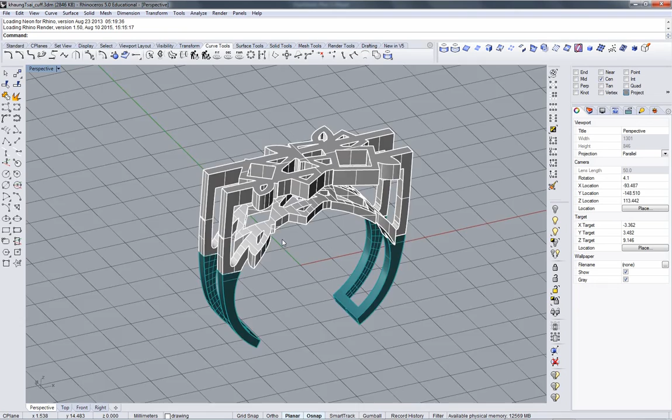Set to parallel, which is hard to look at. There we go.

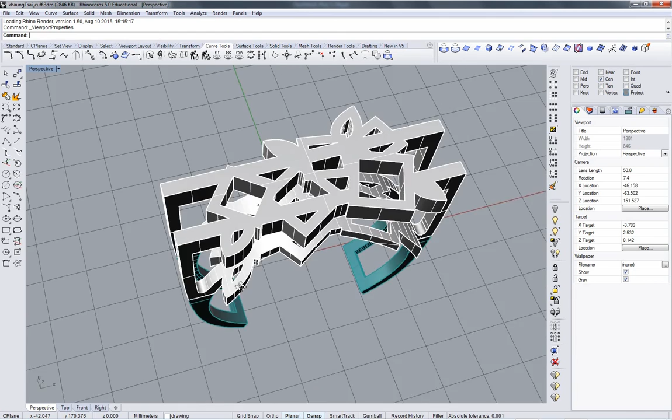So are you going to do anything here in the front, or just leave it open like this? Leave it open. Okay, and who's your mentor? Chia. And is he okay with just leaving it open? Yes, because in the beginning it was solid. Yeah, I had pictured you cutting some interesting shapes and patterns out. Because it was pretty heavy, and once I cut it, I just left it lighter. But you're right, I didn't think about that. Yeah, because you could do some interesting patterns and design across here instead of just an opening.

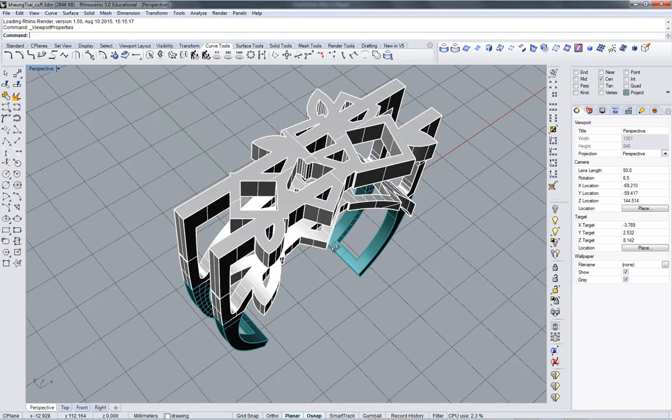And the stones are going to go where? To empty spots first. Do you have stones in the file? Because I don't know how to model a princess cut. Okay, they're easy, I'll show you.

So you're considering this complete at this point? Well, I'm gonna reconsider the whole thing. Okay.

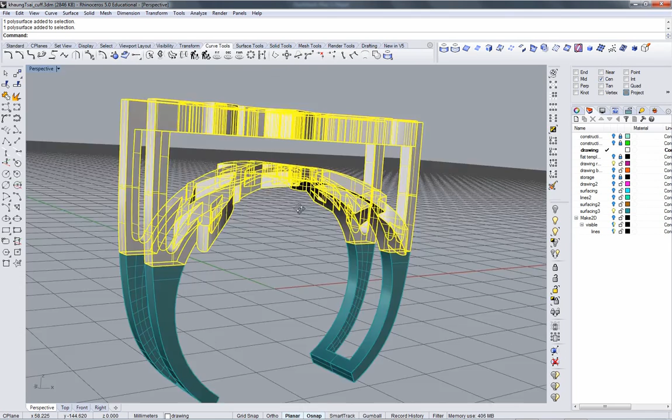And has Chia told you how he would like to have you do this? I talked to Chia and I just told him I was gonna do it right now, but I haven't had another conversation with him at this stage. Because one of our concerns is going to be whether or not it can fit into the printer now.

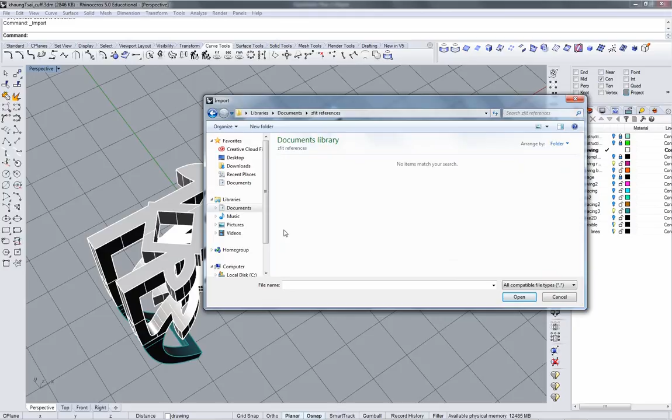If I printed it outside, is it too big in general for all printers? Well, other printers have different, yeah.

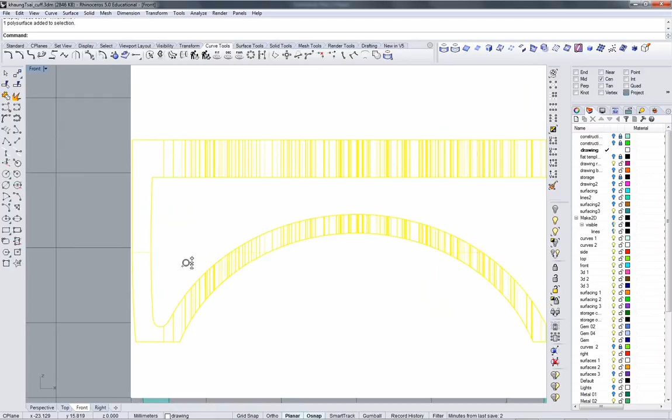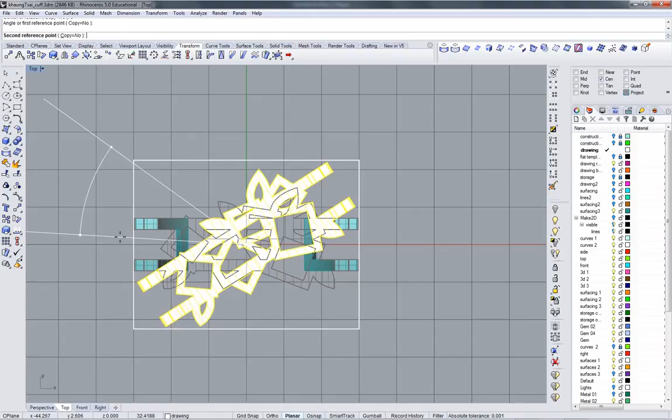Okay. So that tells you you are at the very limit of what that will take. So the way I would have to do this, or the way I would do this, is I'd rotate it. I mean, that's not much better, but that's what I would have to do, something like that.

And then as far as the support direction...

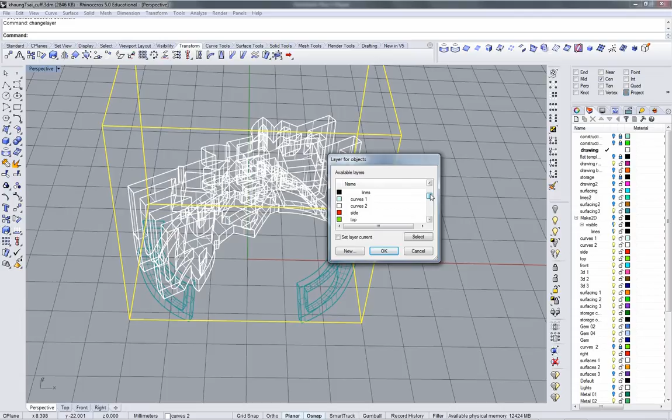I have a question. And you're not in trouble, I'm just curious. I say you're not in trouble because our tutor had brought this up with a student, and the student got very defensive.

This is a matrix file. Where did you get a matrix file from? I'm not sure, because this is matrix. You know how you can tell when something's matrix? The layer names. I helped develop matrix, so I know all there is to know about matrix. I don't even know the difference between matrix and like, see this? These are all exclusively matrix files, from my matrix layers, yeah. I don't. In fact, this one has something on it, which is from matrix. It's got a head, a matrix head.

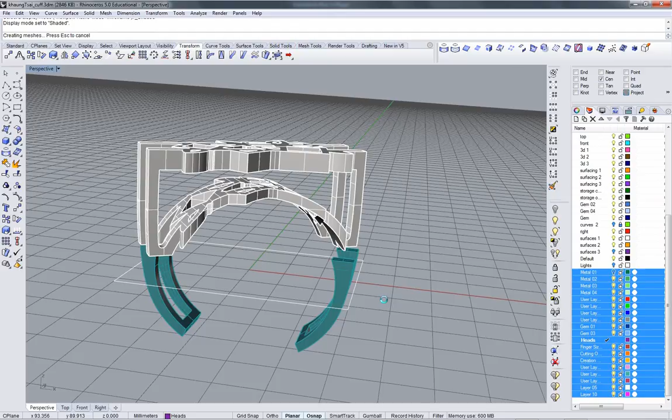So like, what is matrix? It's like... matrix is thousands of dollars. It's a Rhino plugin. Oh. The stupid version. Yes, see, this was done in matrix. I don't recognize this. This isn't like... yeah, that's what's... oh.

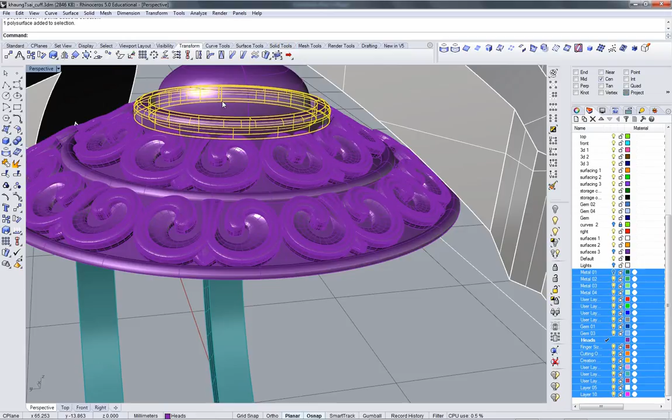It's just not sure. Yeah, interesting. The only reason I ask is because matrix is very confusing to work with. It's not hard, it's Rhino with a black interface. So matrix is a part of Rhino? Or it's a plugin for Rhino. Okay, and it's a software that's developed around Rhino to make Rhino's interface easier to use for jewelry.

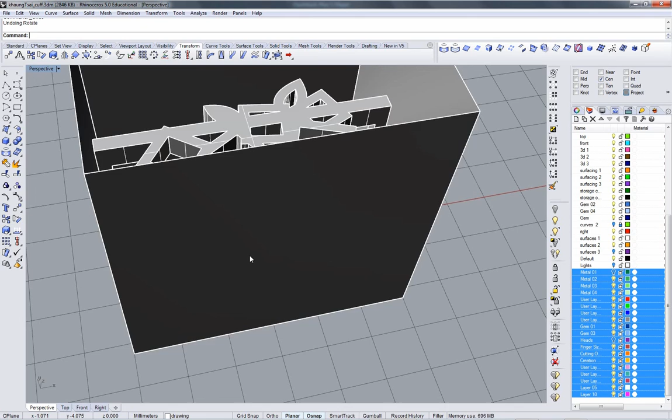It's very expensive software. I'm really not sure how I'm going to sprue your part to support it. I will probably rotate it. You know, this isn't really your concern, but I need to know because I need to find out if you need to make it more than one piece.

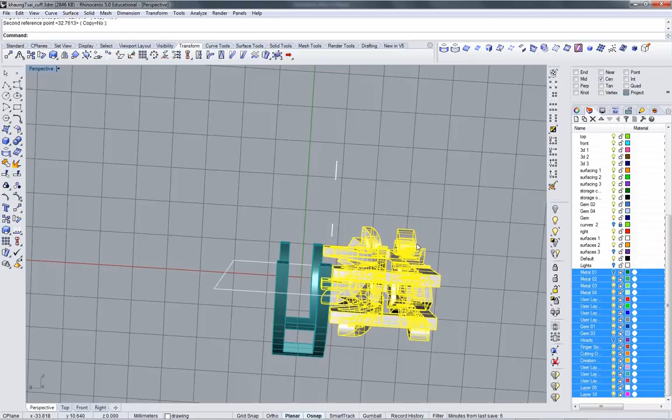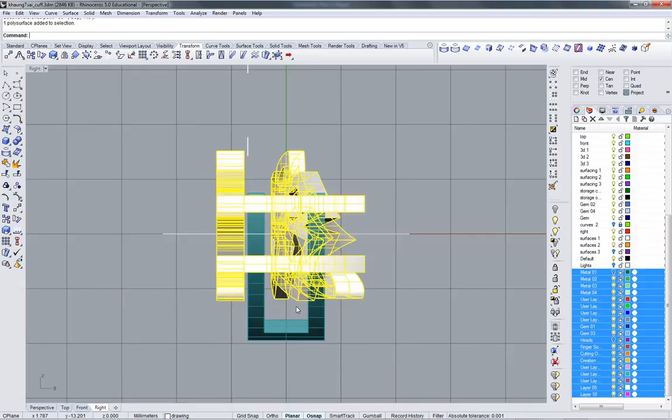That won't work. Wait, so you're saying that my file has the other files inside? Uh-huh, yeah, in fact, if I'm not mistaken, that's Shania's. It looks like Shania's, it looks like one of her heads. Yes, I don't know how you would have gotten a hold of it. And her family uses matrix, so that would actually make sense why it has matrix.

Just trying to find a way, because if we can't... how important is the size of this to you? It's like I made it to fit mine. I even made it smaller to fit me because before I did like standard size. And I was like, oh, why don't you just make...

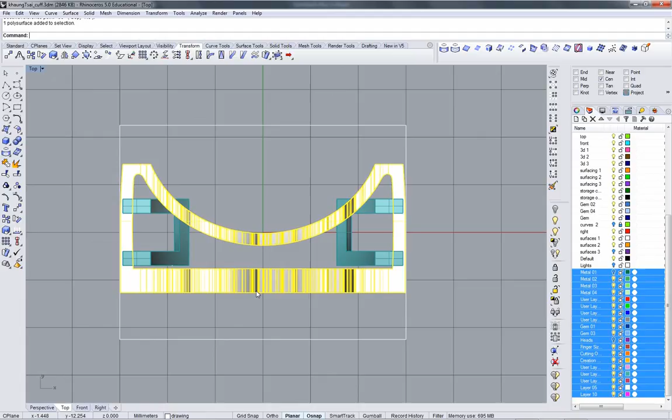It bigger size. Okay, did you watch the video that I sent you, or not the video, the article? Oh, you're not in my class. I'm only in your Rhino class. Yeah, I sent out an article on cuffs, I think it might have been in the Rhino class, talking about how big to make a cuff, and how big to make the opening at the bottom. So this is 1 1/4 to 1.5 inches at the bottom, so I wanted to make yours would be a 1 1/4. Yeah, I made it 1.2 inches, but I wanted to make it bigger, but I thought it would look weird and then it would just fall off. Yeah, since the metal's so heavy, I don't know.

Okay, and what is the inside circumference on this? I don't remember, but I have a drawing here and it has that. Okay, all right. Last thing I'm going to see is if I can rotate it up, because I'd like to be able to use it in this printer, if you can.

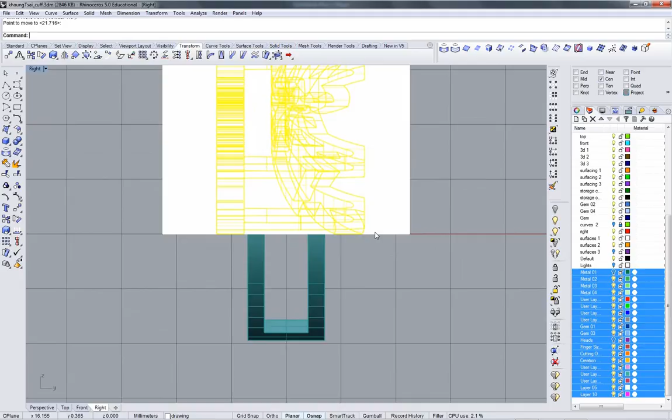Okay, if I rotate it that much, I can make it fit. Okay, all right, so we're good. You can use this printer.

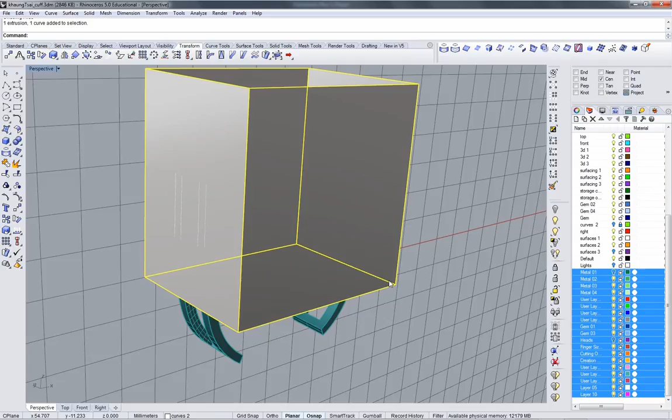Do I get a free print because you get like three prints, but mine's pretty big? Well, you get 3 projects. This is 1 project. Oh, okay, so you're fine. This is completely Rhino, so we'll be printing these as well, but in a separate job.

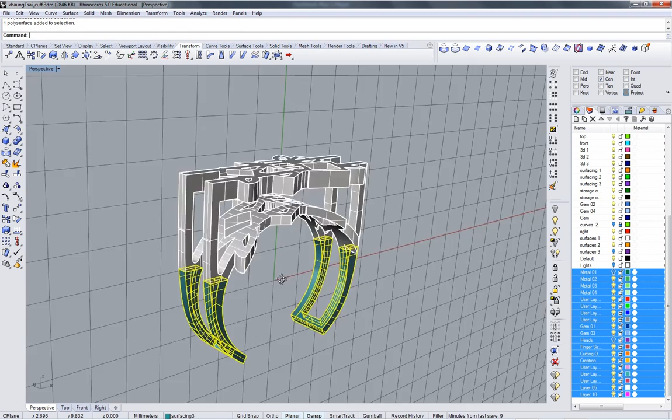Okay, I might mill these, I might do this with those just to save time. I was just thinking if I could mill this part, but I don't think so. I think it would be too difficult to mill. I would have to put it in this direction. Yeah, it'd be hard to mill.

Okay, so all right, so your question for me is the stones? Yes. Do you know what size stones you want? 9 millimeters, and the other one's 7.

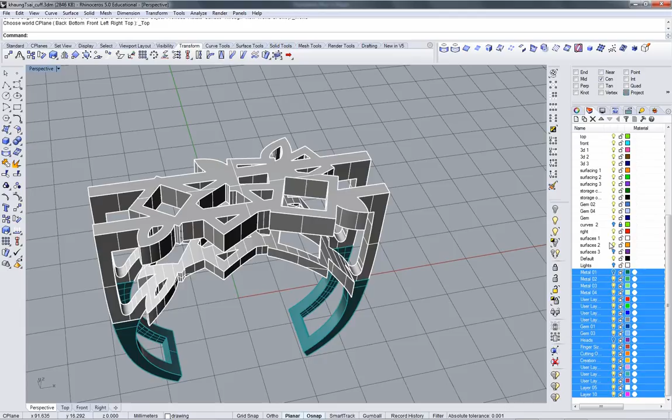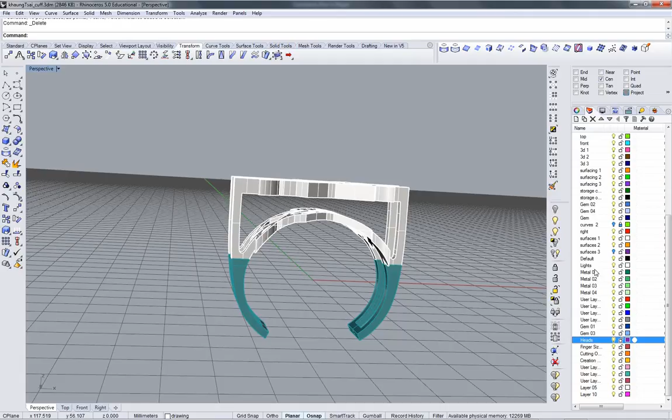Okay, yeah, this has been set up to render. Cool, you have all kinds of crazy stuff in here. I don't even know how to set it. Everything that's Matrix is not yours and kind of crazy. There we go. In fact, I'm going to make your file a lot easier.

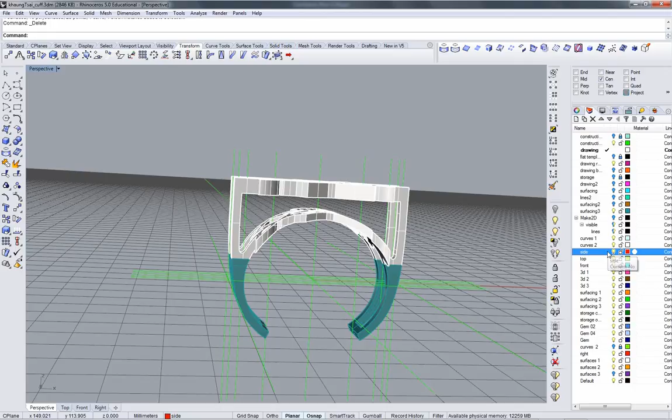Now you don't have all of those crazy layers down below. The cuff thing is on the ground surfacing 2. Okay, and where is this part? It's a white layer, in drawing, it's called drawing, the one that you checked. Okay, and the part below? The green, it's construction on top. Oh, the part below, sorry. Surfacing 3. Okay.

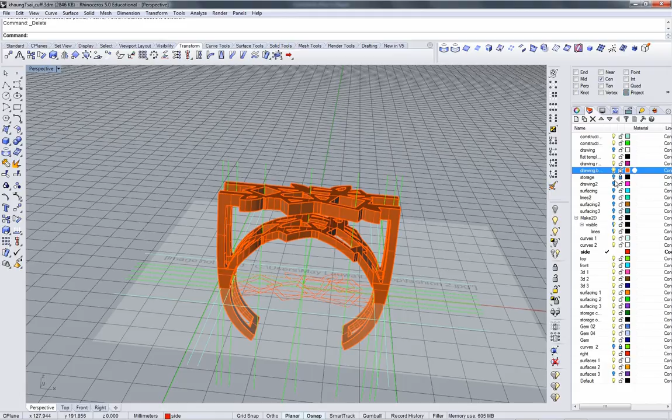This is your drawing? Yes. Except it doesn't show up in here, it's just fine. That was my old one, I think, or backup. Okay. I'm just going to clean this file up.

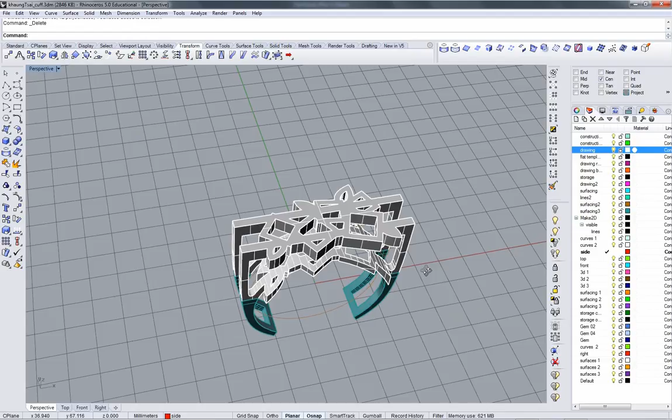Much easier for me to navigate.

Can you say in the video, when you selected 2 points in the whole row, what just turned on, what's that? You have it, it's right here. See this tool button right here? You want to get this toolbar, you get it under Select. You look for the one that has the little lasso on it. I have a Mac, now I don't know if it's going to show up on the Mac. Yeah, I don't know either, but this is the toolbar it's under.

And what you're looking at is Select U and Select V, these are the actual commands, and you can type that in. Yeah, we tried with the Rhino Tutor on Saturday. She couldn't type in Select U? Didn't count for a Mac, I don't think. I can ask her to try that. Yeah, see if Select U will work and Select V, because that'll allow you to select the whole row.

All right, otherwise you have to just rotate it manually, and that's what I do. Thank you. All right, so there, this is gonna be a lot easier for me.

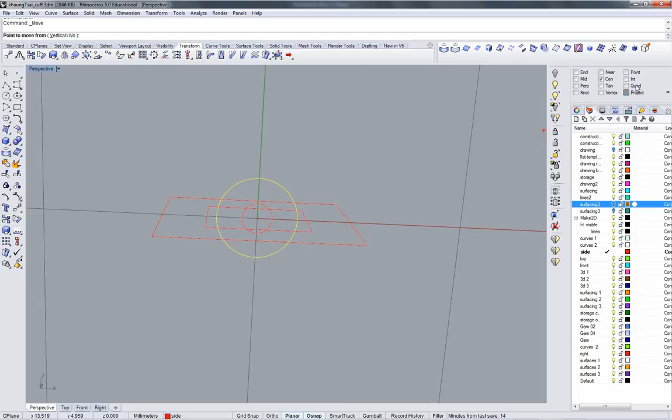So 9 millimeters. Circle from rectangle from center. 9, 9, there's a 9 millimeter princess. You're going to scale this 53% for the table. Copy equals yes.

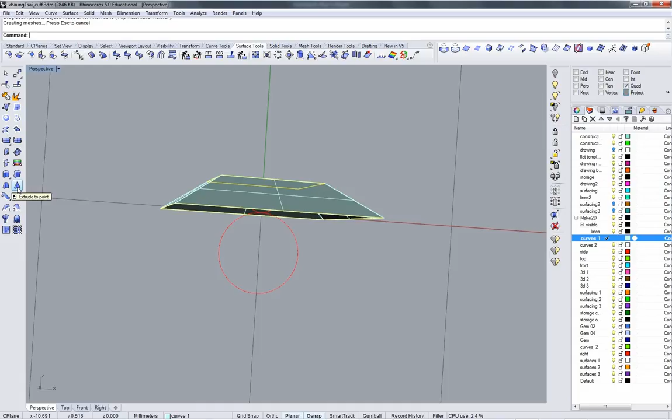You're going to set up your pavilion, your stone depths. You're going to do that by making circles like we did with a round stone. The diameter is 9, so that's where we start with. The pavilion depth is 43.1, so we're going to, and the crown height is 16.2.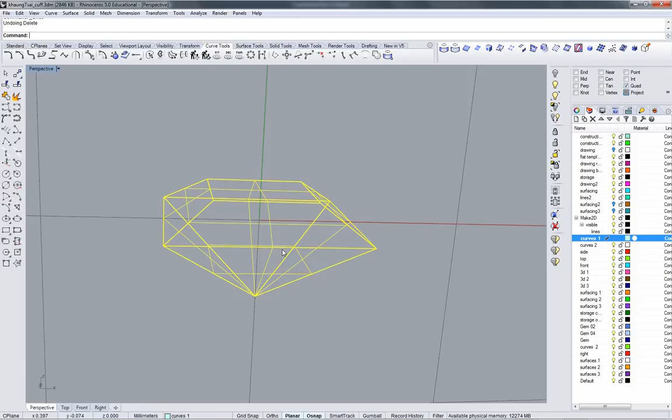I can delete the outside one now. Move this using its quadrant down to 0. Move this one using its quadrant up to 0, like a little snowman. Gonna move this from 0 to the top of this quadrant, and I'm gonna do a loft command. I'm going to do extrude to a point. Extrude down to that quadrant. I'm going to join these together, and I'm going to cap planar holes.

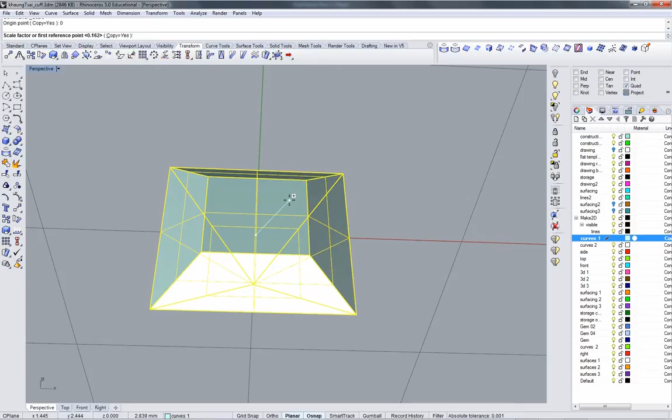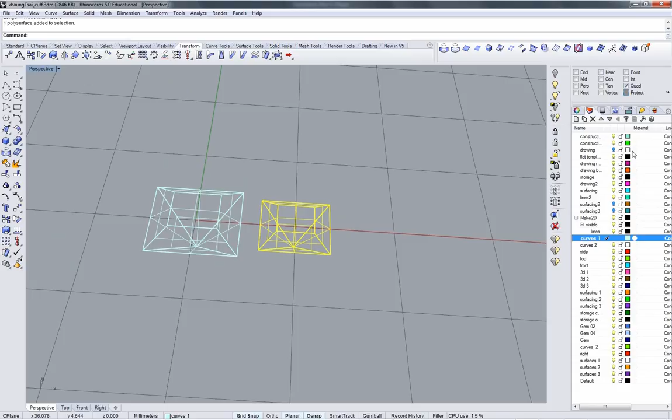Oops, not that. There, there's a 9 millimeter princess. You don't need the facets, you're using this as a dummy to put into your part so you know how big to make things. All that faceting would be, for you, 3 hours that you're never going to get back. Okay, so that's the 9 millimeter.

How big is the other one? 7 millimeters. This is going to be really cool, because in Rhino, all I'm going to do is go scale 3D, copy equals yes, 0. And then you can type like a calculator in the command line. Okay, so I am going to go 7 divided by 9. It's done.

Oh, 'cause I was always wondering if it's not 10, I have to like draw the math. And you always do verify, analyze length, pick any edge.

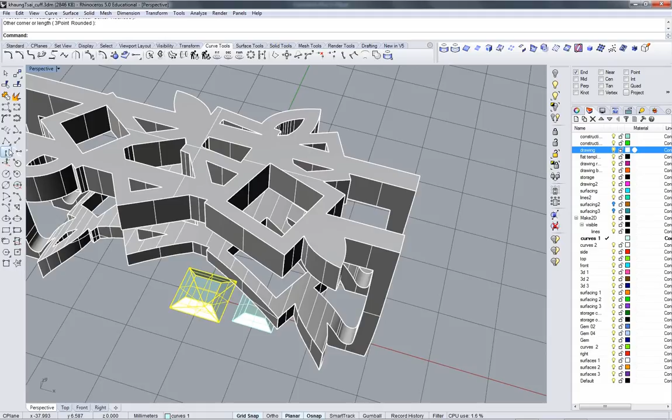So there are your 2 stones. They're done. Okay? And you want these to go here and here, correct?

All right, I'm going to do an orient. Now I got a couple things I can do. Orient's not smart. I want to get a point right in the middle of this. So I'm going to actually draw.

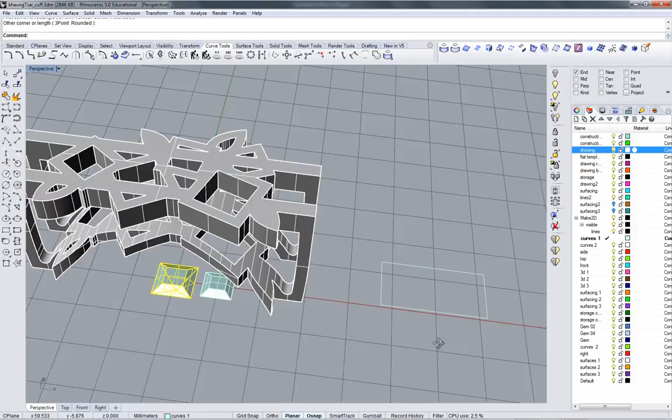Oh, go away, stupid thing. Stop, quit trying to open PowerPoint. It was my bad, okay.

End snap, curve. I'm just going to drag one of these. Don't want project. No, that's not going to work because it only wants to go with the C-plane. So I'll draw this one.

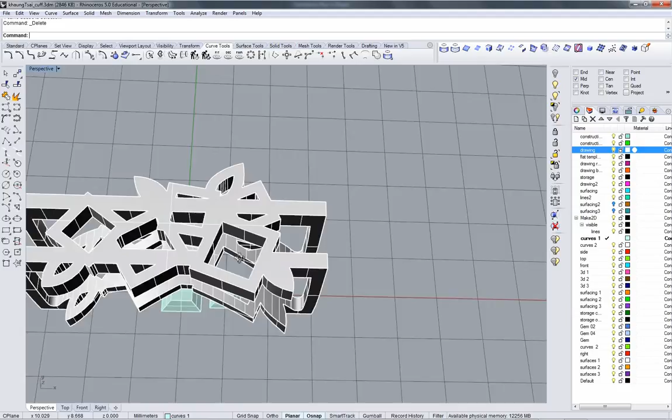Why are you fighting with me here? Smart track isn't on. It's off. Grid snap is on. Thank you.

So you couldn't use the rectangle tool, so you're just going to use the poly? Yeah, the reason I can't use the rectangle tool is it's C-plane dependent. So it'll only draw rectangles that line up with the C-plane.

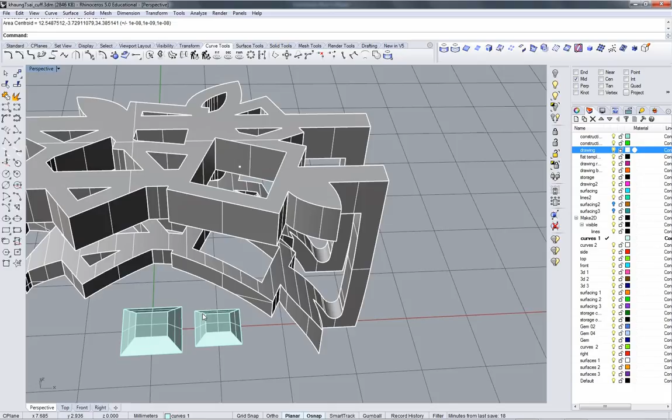Faster just to draw with polyline. Okay? Any closed rectangle should have an area centroid.

That's - where did you get that? Analyze, mass properties. Okay? Okay, one more question.

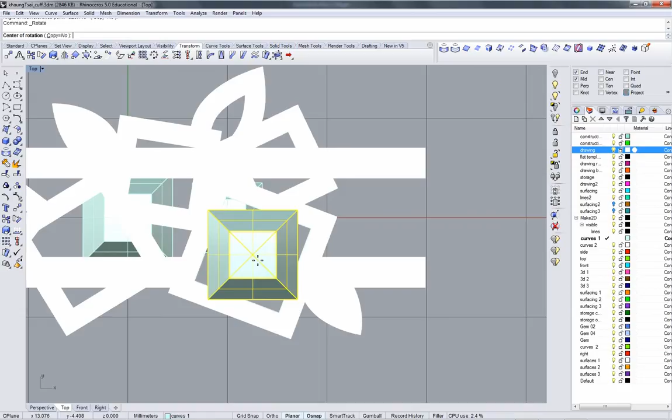The stone depth that when I measured it was like 5.2 or 3, but I made this, I think, 5. Can I make it any smaller? Sure, you only need 1 millimeter. Okay, 'cause it was just so...

In fact, you're going to want to hollow that. Okay? And we'll talk about that in a minute. So I'm going to move this while copying. We might want to keep them flat for future use.

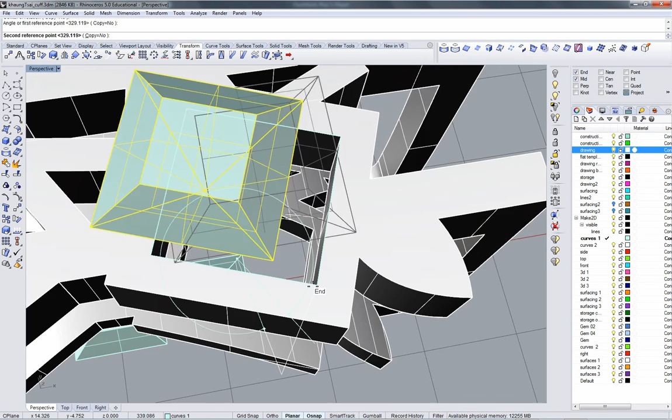I'm going to grab the end point. Okay? So I've got this. I want to rotate this.

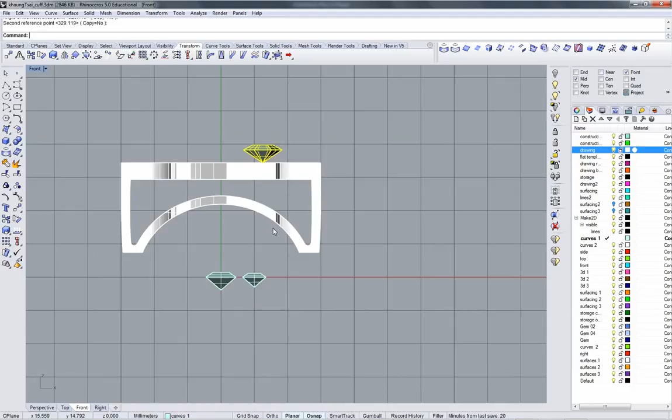From here to here, and I'll go ahead and project. Actually, I'm going to start with project, that way I don't get any craziness. It doesn't look like any different here, but by projecting, all of my pick points go all the way to the ground, and that way I don't get a weird angle.

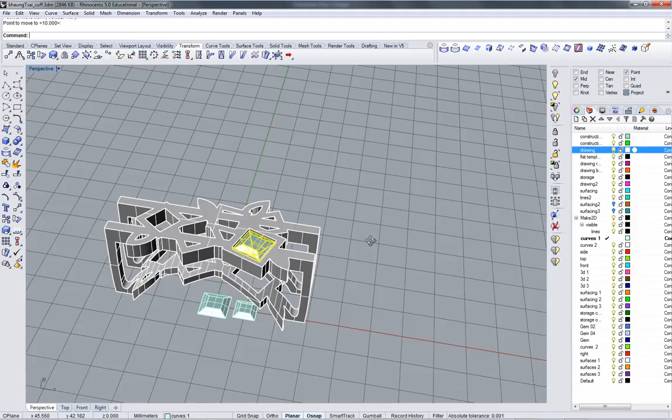Oh, that's weird. That's a weird thing I don't like. So I'll go from point instead. Point. Mid. Mid, I'm catching the edge of this.

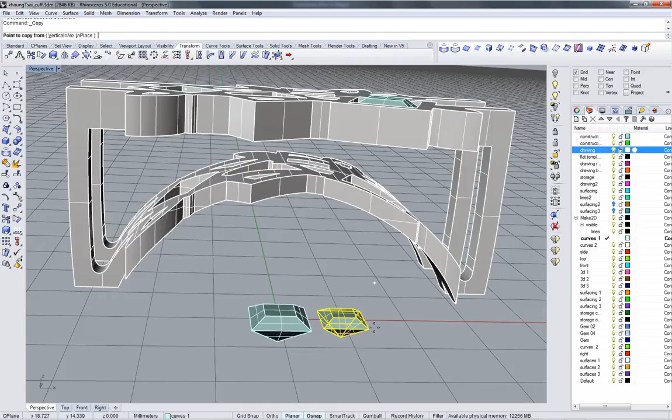Okay, this is now oriented to fit. I'm going to move it down. You use the midpoint on the stone as well, right? Yep.

If you're going to bezel set this, you're going to glue it, right? Yeah, so you're not going to bezel it. If you're going to glue it, you want to just put it down in here so you have enough room to make it look like it's set in. That's enough.

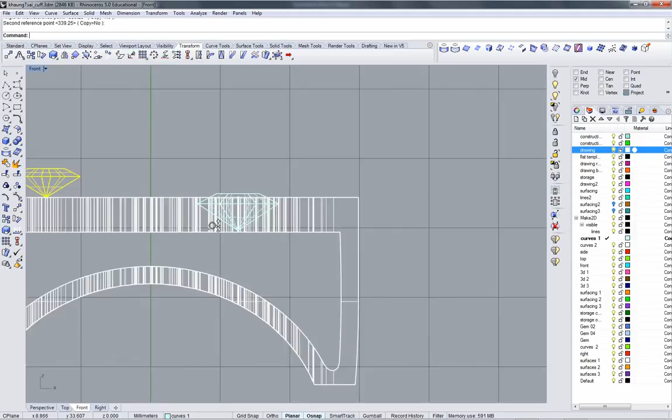Okay? Time for this guy. First I got to get my area centroid. Turn off project, go back to end. 1, 2, 3. Area centroid.

Grab this little guy, and rotate him as well.

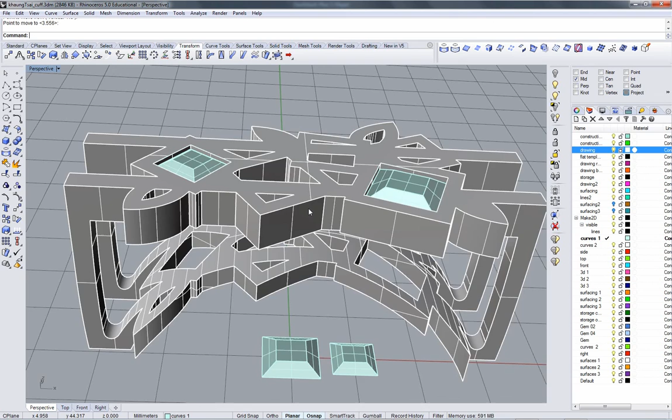Project. Mid on the stone. Mid on the piece. And move it in about the same, so that it's about halfway up the crown.

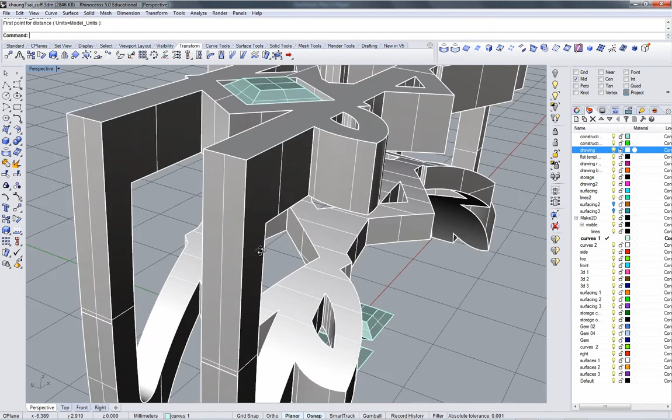Yeah. Okay, what you've got to do now, May, is you've got to create a seat. You don't have seats in here. Okay, that's why I was confused. I didn't know what height. Yeah, you need to create a seat, and you're going to want to hollow this thing.

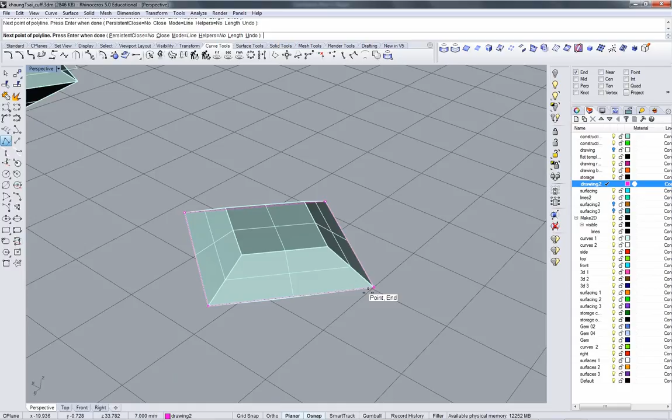Because that's a lot of, well, maybe not. How thick is this? Do you know how thick this wall is? 2 millimeters. Ooh, maybe so. Analyze distance. Now there's nowhere to check. This is 3. Well, the sides are 3, but the shape ones are 2. Or 2, so they're 2 by 2.

There's no point hollowing this. If you hollow it, there'll be nothing left. So that makes life a little easier. Mouse, let go, my mouse is dying. It's wearing out. Now I'm just going to come down to our stones.

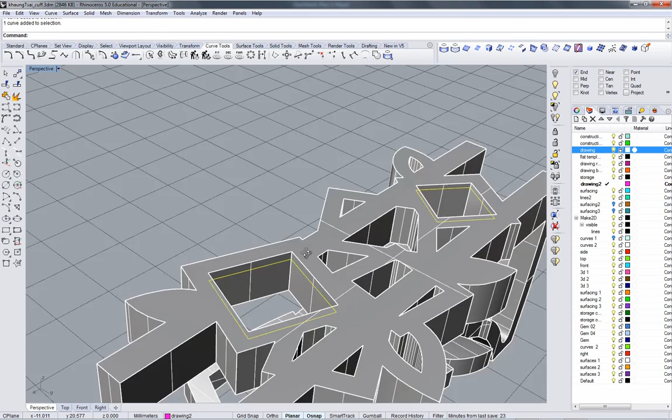I need to borrow that girdle of that stone. Polyline tool again, without project. And I might as well grab this one while I'm at it.

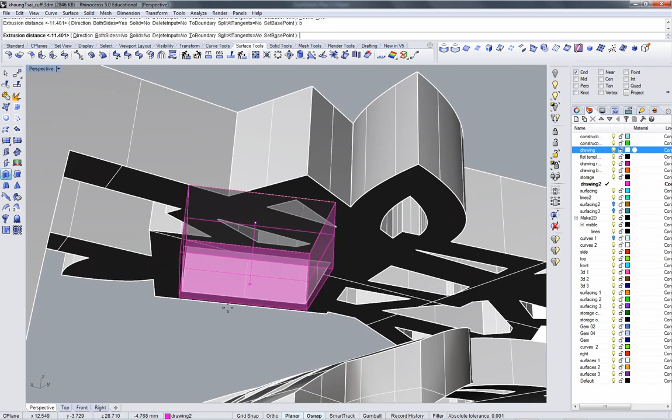Come back here. My computer's acting up because I have the recording software going on in the background, and that requires a lot of resources. So my computer's getting tired.

Alright, so I've got this, I've got that. Turn these off, wherever they are. There.

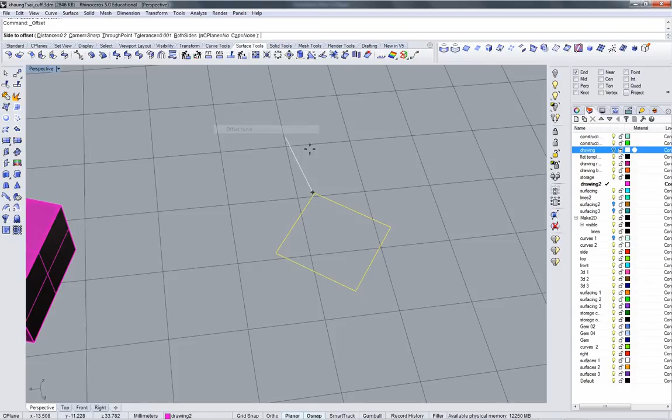May, I'm going to turn these into a solid object. I got to bring back your drawing here and figure out how I want to handle this. I want this to fill in solid. That's what I want it to do. I don't want any opening here. So I have to figure out how I want to do that.

I think I want to offset this curve, not very much, just enough so that it overlaps. 0.2 should be fine.

And then I want to extrude it straight down until it is 2 deep.

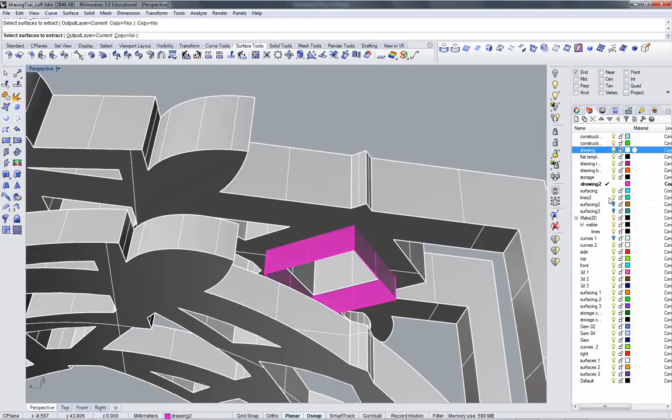This is the line for 0.2, the offset line. I'm going to make a planar surface out of this. I can delete that curve. I'm going to join these guys together. It's going to do the same thing over here.

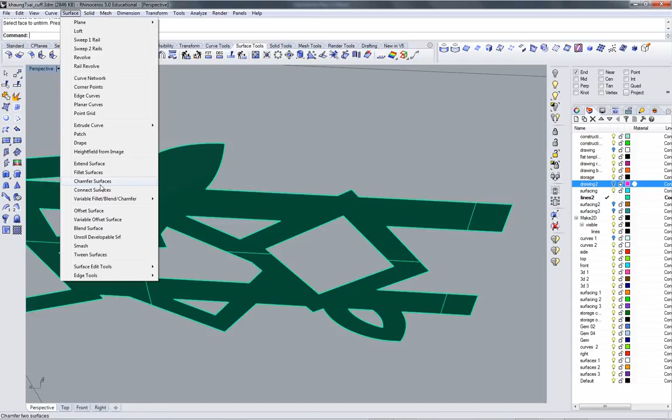Same distance should work for the extrusion. So now I got 2 little blocks. They're 2 deep. Okay, I'm going to extract this surface.

If you right click on explode, it gives you extract. I don't want a copy. I want this to be the original, and I want it to go to the current layer.

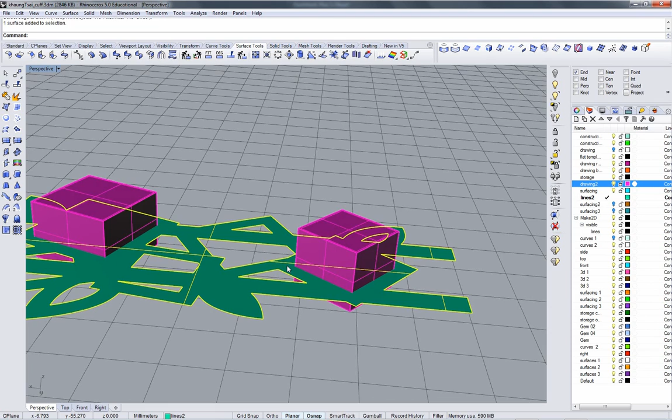So much easier. I did it manually by duplicating edge. And then I'm going to untrim this hole.

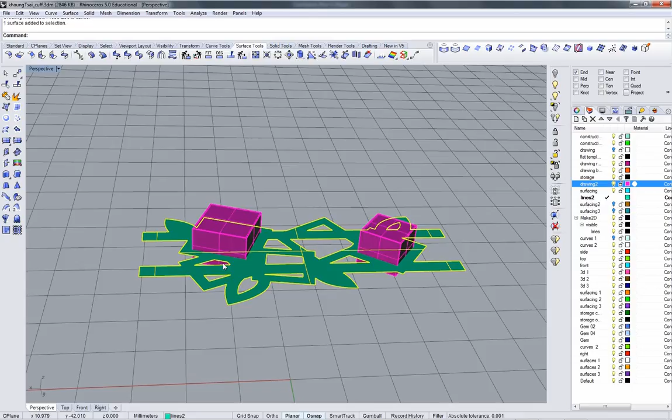Just want one hole, not all holes. So I'll just grab that. And that.

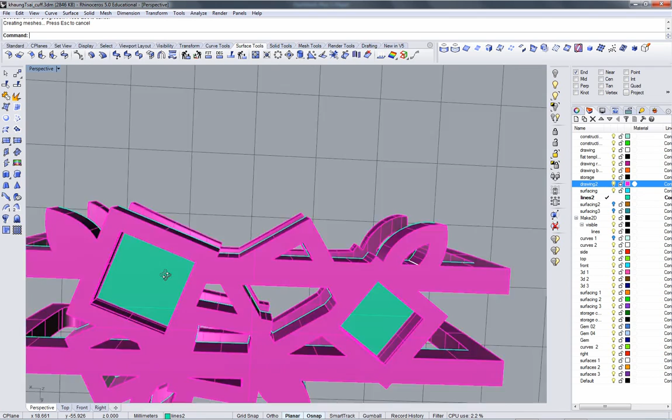And I'll cap these. I'm just thinking out loud. I want to...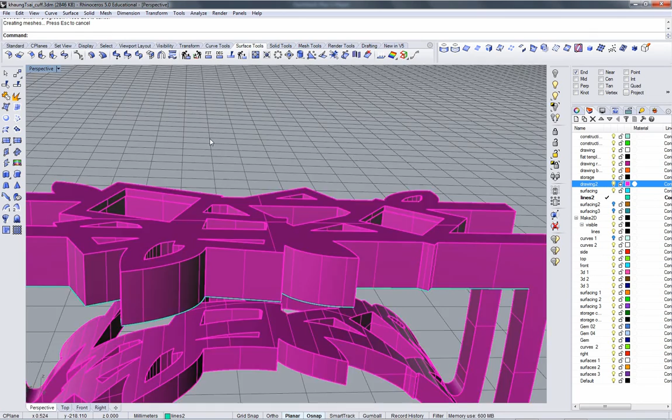Put this back, now that I've taken it off. I don't want to lose it. I don't want to lose these either. So Control C, copy them both, undo.

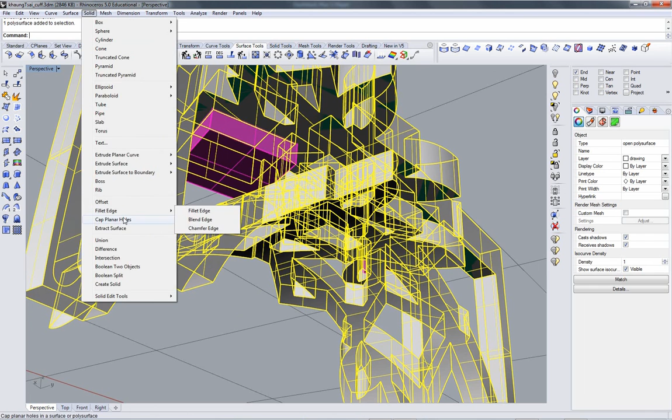Now it didn't work, because that should have been solid right there, and it didn't work. So actually, oh, it's because this isn't—I didn't go back far enough. Now I can do it.

Now I paste in. I didn't undo quite far enough. All right, now I'll try it. Solid. Nope, did the same thing.

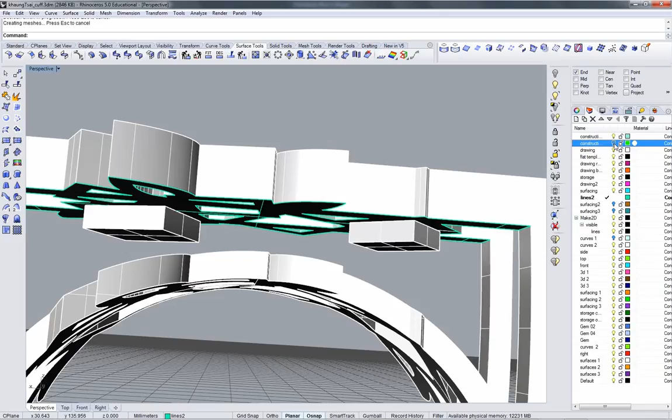It really doesn't want to keep this. When does union work? Because sometimes I try to use solid union and I can't do it. And we're going to find out why right now.

First off, we're going to look. It says it's an open poly surface. That's the first problem, yes. Boolean likes closed, and these are open because you don't have caps on the bottom.

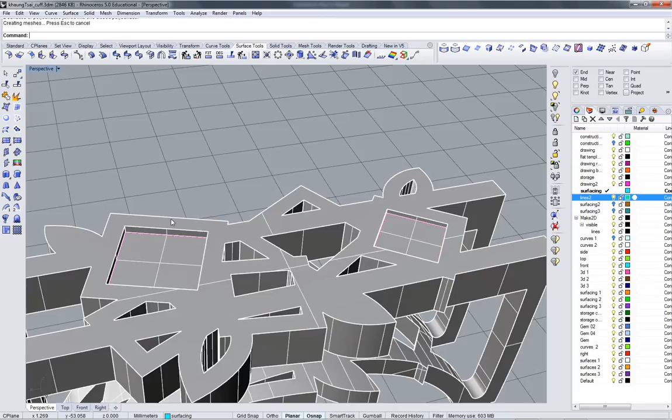You do now. Now we'll try it again. Okay, so when you're using Boolean, everything has to be closed, yeah. Rhino instructions will tell you it doesn't, but Rhino instructions are lying.

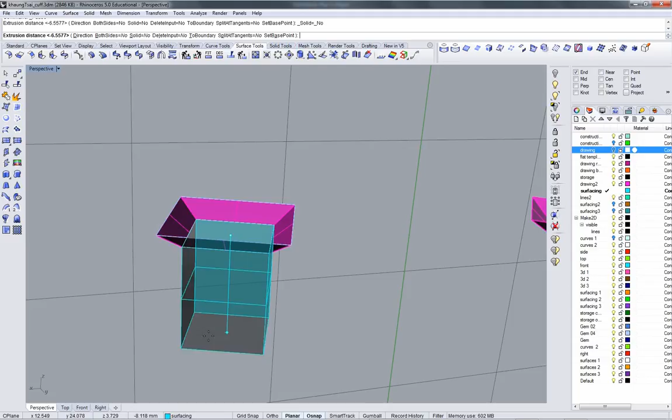Okay, I'm going to hide this for just a minute. I'm going to extract surface. Take this off, throw it away. Throw that away. Throw that away.

Bring this back. That's the same bottom, but without. Yeah.

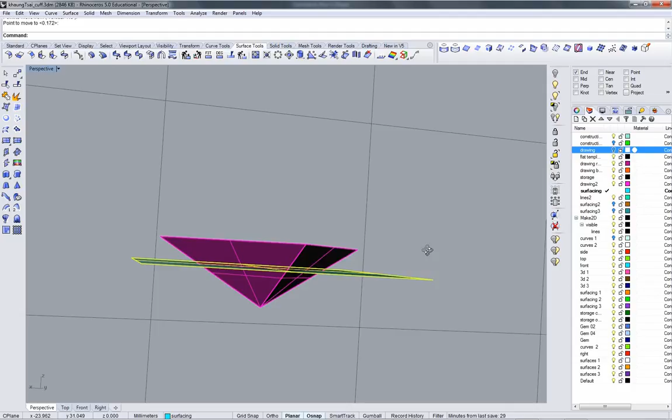Now you've got a seat for the stones, and that's all solid, which is really scary. Okay, I'm going to bring back your stones now, wherever I put them. Where do I put your stones?

Here. I need to turn these into cutters. So I'll make a copy of both of them and put them on a different layer.

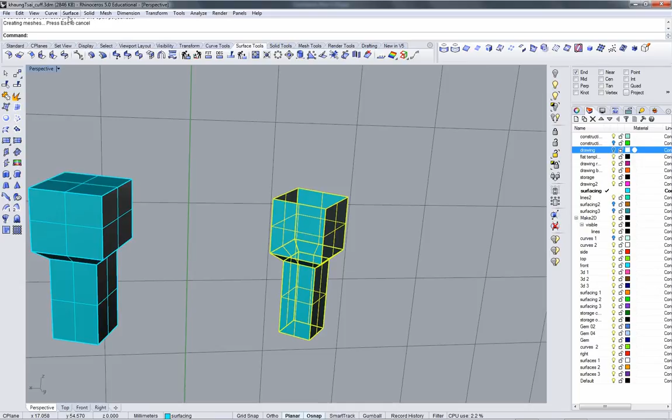From drawing from that, I want a cutter that comes all the way in from the top. So I'm going to extract surface. I'm going to take everything off the top of this stone, everything off the top of that stone, enter, delete.

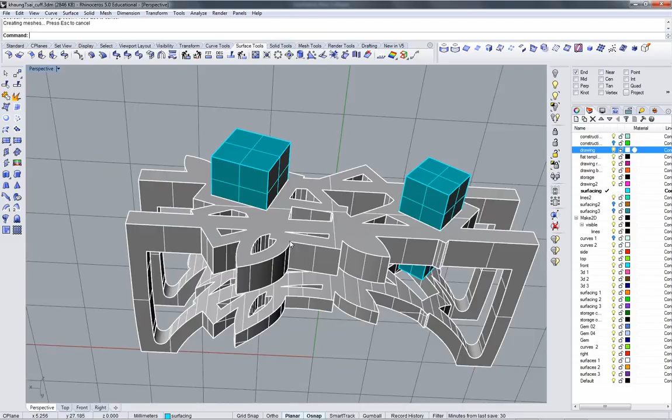I want to have a cutting plane that goes through this, so however much of this I cut off is going to give me a seat for that stone.

I think that's probably enough. Not a little more. Okay, that's fine. Trim the bottom of this off.

I'm going to duplicate borders so I get two curves. Take the bottom curve and I'm going to extrude it straight down. I'm going to take the top curve and I'm going to extrude it straight up.

I'm going to join these guys together and cap it. That's my first cutter. Do the same thing over here. Cutting plane.

Move it into position. I just want to leave enough of that stone to sit comfortably on. That's good. Trim the bottom off, duplicate me some curves, grab the bottom curve, extrude straight down, just so it's long enough to punch through.

Grab the top curve, extrude up, once again just long enough so it punches through. Join these together. Hi, are we now? Yeah, okay, come on in.

Have a seat. Solid, cap planar holes. Okay, now that we've got that...

This one's kind of a problem. See how it breaks into here? Can't have that, so I have to cut it off a little bit. I'll just do a difference, make sure it's pointing the right way.